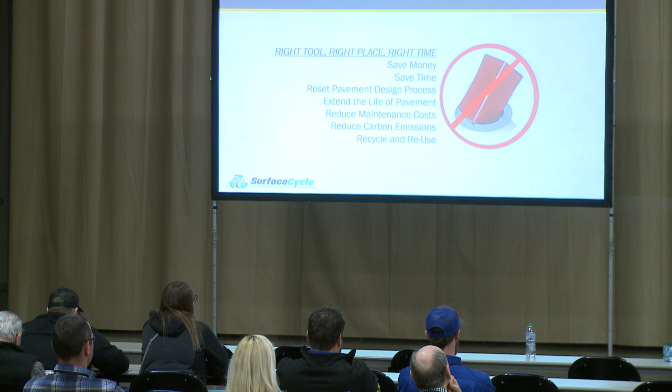That's really applicable when it comes to cold-in-place recycling. And so in order to ensure you're utilizing the right tool at the right time, the right place, you should be able to say yes or check off each one of these things you see up there on the screen. You should save money versus what your alternative might be. You should save time, accelerate your construction process. You should give yourself a chance to really change your design process and how you look at that whole entire pavement layer system when you're doing that. And through that, you should be able to extend the life of the pavement, make it last longer if you're utilizing the right thing.

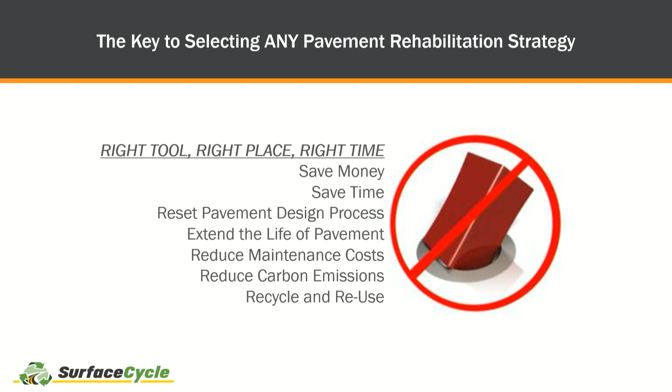This is when you compare it to the other options available to you. Ultimately, you want to reduce maintenance costs. Some folks care about this more than others, in different circles I run in, but reducing carbon emissions and recycling and reusing matters too. When I think of roads we've recycled in the past with cold-in-place recycling, when we see an old, tired, aged, oxidized asphalt pavement, I don't see that as a liability. If you're an owner, I would look at it as a resource that taxpayers have already paid for. The rock that's in that old asphalt is still there, still good. The asphalt that's there is still good. It just needs to be repurposed. So really, the last thing you should do is tear it out or take it apart. If you can repurpose it, it's a better investment, and you're utilizing the materials you already have there, ultimately leading to lower costs.

So what are the benefits of cold-in-place recycling when you utilize it on the right road, at the right time, in the right place? You should see a reduction in pricing of 35 to 50%. That's the type of benefit you should be looking for. If you're not saving that kind of money, there's probably a different technique that would be better for you. The great thing about cold-in-place recycling is you're creating cold mix, and cold mix is really good at reducing or even eliminating reflective cracking in your asphalt pavement. I'll talk about why it does that a little later, but whenever you can reduce reflective cracking, you're going to get a pavement that lasts longer.

So that's why you want to do CIR. With reduced cracking, your maintenance costs go down. You have less cracks to fill, less water infiltration into your subgrade and base down below through those cracks, making your pavement live a longer, better life. The CIR process on the right road, properly engineered, will last 25 years plus. We have some examples where it's lasted more than 40. It really just depends on the condition of the road when we first started.

And this is where you're applying it on the right road at the right time. We have done this on roads when it was the wrong project, wrong time, wrong pavement condition - they might last 8 years. So really, project selection is key to making cold-in-place recycling work for you.

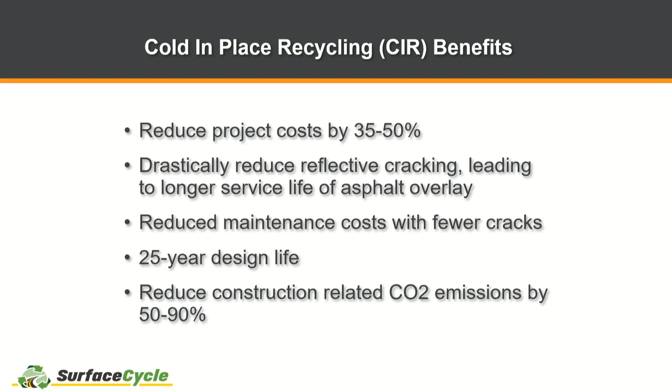And then you should reduce construction-related carbon emissions by 50 to 90%. I know in North Dakota this isn't a big deal, but in other states like Colorado, they're talking about carbon emissions all the time. The state of Minnesota, legislatively, has to start reporting CO2 emissions on their construction projects by 2028, and we're kind of scrambling.

I'm from Lakeville, Minnesota, by the way. And the DOT and the paving associations, everybody's kind of scrambling to figure out how we're going to do that. So I don't see that coming to North Dakota anytime soon, but folks around here are doing that.

So let's get down to the cold-in-place recycling process. This is a multi-unit train. The process itself is we want to go out on an old, tired, oxidized road of asphalt, and we want to basically repurpose that old asphalt. How are we going to do that?

Well, we're going to cut that road up. We're going to pick it up a full lane width at a time with that mill at a depth of 3 to 4 inches. We're then going to crush and size that recycled asphalt down to whatever specified size it needs to be. Most of the time it's 100% pass at 1.5 inches, sometimes 100% pass at 1 inch. We can change up our approach with the equipment we have to really meet any gradation specification that's out there.

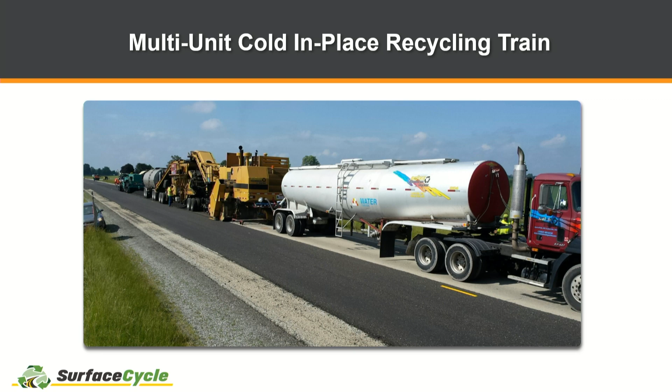After we've recycled that asphalt and sized it, we add some oil to it - might be an emulsion, might be foam. We make cold mix and put that cold mix in a windrow. Then we pick it up and pave it like you would a normal hot mix job, with a pickup machine, modern paver, and you roll it out.

So we generally get about 2 lane miles a day as our production goal when we're doing cold-in-place recycling, so we can move right on down the road. Now that can vary a bunch. What makes it vary the most is the hardness of the rock that's in the asphalt.

I'll give you 2 examples from Minnesota. If we're working in the southwest part of the state where they have quartzite in their asphalt, that stuff cuts hard - it is hard rock, really abrasive. We might only get 1.25 miles a day, sometimes just 1 mile if we're doing a 4-inch cut. We go to the eastern part of the state, though, along the Mississippi Valley, where there's a lot of limestone - it's really soft.

That stuff's easy to cut, it's not so hard - we might get 4 miles a day. I think our highest production day, we got 5.2 miles in 1 day with the process. It just depends on how hard it's going to cut.

And what are we producing? We're producing cold mix. A lot of folks, when you conceptualize cold-in-place recycling, you come out to a job and you're going to see something that looks a lot like hot mix, honestly. So it's going to be black, it's smooth, it's paved in a similar fashion.

But it's different. Picture on the left there, that is a cold-in-place recycling job, where that lane on the left is the lane to be recycled. The lane on the right has already been rolled out - it's completed, so it looks black and smooth, looks a lot like an HMA job. But the 2 materials are very different.

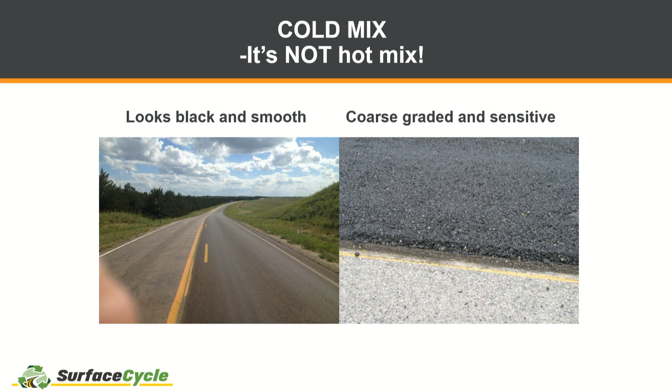So when we make cold mix, the percent voids in cold mix versus hot mix are about double. So we have a lot more free space and void space in it, which is great because that helps prevent reflective cracking. What it's not great for, especially here in the upper Midwest, is making it through a winter, okay.

If you had a cold mix mat that had been compacted and left out to the elements in the winter, not surfaced with anything, you're gonna get water infiltration. It's gonna freeze and pop out and make a mess. It can't live on its own, so it always has to be surfaced with something. That's why I say it's sensitive - it needs to be covered up, it needs a blanket over the top. There's lots of different ways you can cover it up, though. We'll talk about that in a bit.

It's gonna jump forward like 3 times now.

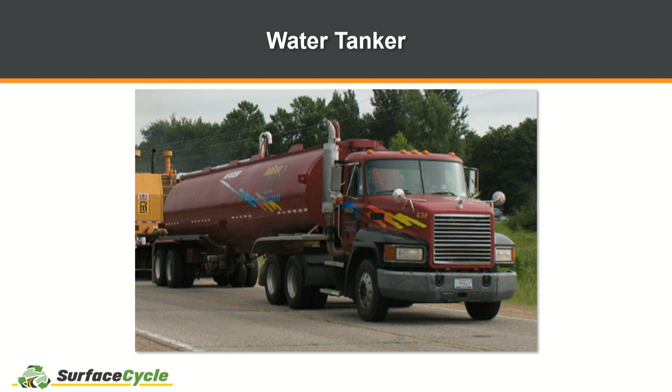So I just want to pull the parts of the train apart and tell you about what we're doing with each of them, with the construction process. So up front, you'll see a tanker. Most of the time it's a water tanker, sometimes it's an oil tanker. An oil tanker is basically feeding the surge bin at the back for making the cold mix. If it's water, we use water for several different things on the train.

One, we use it for cooling our wearing parts. We have these carbide bits we use for crushing this asphalt. With a little bit of water, they last a lot longer.

Two, we use it as a compaction aid when we're compacting our cold mix. We'll optimize the amount of water we should add in the mix design process, then we need to add a little bit of water.

And then three, another reason we use water is as a dust suppressant, to keep silica dust from exposing our employees to that type of issue, when we're crushing RAP or asphalt. We want to keep those small particles out of the air and keep our employees from breathing it in, or construction inspectors out in the grade or anybody else that might be driving by.

And so the reason we call this a train is because the first 4 pieces of equipment I'm going to talk about, they're all interconnected with pintle hitches. They're all connected together.

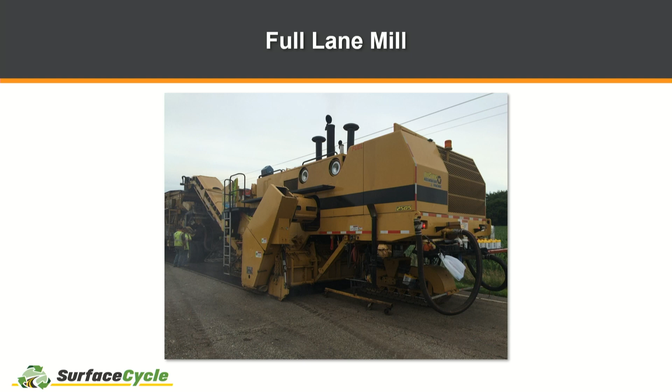And so the next piece of equipment, that's the locomotive on our train, is our mill. This is a big 12-foot wide mill. You can pick up the asphalt depth of 3 to 4 inches at a time. It just cuts 3 to 4 inches all day, every day.

That's the only job it has, is to pick up that asphalt and get it back to the crushing plant to make cold mix. Now what's unique about this mill is that it does have a down cutting drum. Most mills have an up cutting drum. An up cutting drum is really efficient at getting old asphalt up off the road and up into a truck. A down cutting mill head actually helps you with sizing, so we get additional crushing with a down cutting head. It helps us get better gradations.

We use this piece of equipment. Now I did talk about carbon reduction and carbon savings. This big mill is about 1,050 horsepower, and it's very thirsty. It drinks a lot of diesel, and it is not environmentally friendly, but it is the most efficient way that we have out in the roadway to get asphalt recycled today. So honestly, the biggest expense on our train with our equipment is that mill right there.

Pulled behind that, so this will be interlinked too with our pintle hitches, is our crusher pug mill platform. And so the RAP that comes up off that rear conveyor, we get dumped in the screen deck. We screen 100% of the RAP that goes into our cold mix, so we ensure we have 100% sizing on our material. And that oversized material actually moves away from the right side of the screen to the left and goes down into that crusher.

So we're able to have a secondary crush. We crush that RAP a second time - not mill heads the first time, second time's with our crusher. It goes through a closed loop conveyor system back up to the screen deck. If it's sized appropriately, down it goes up to the pug mill. If it's not, it goes through the system again until it's crushed down to size.

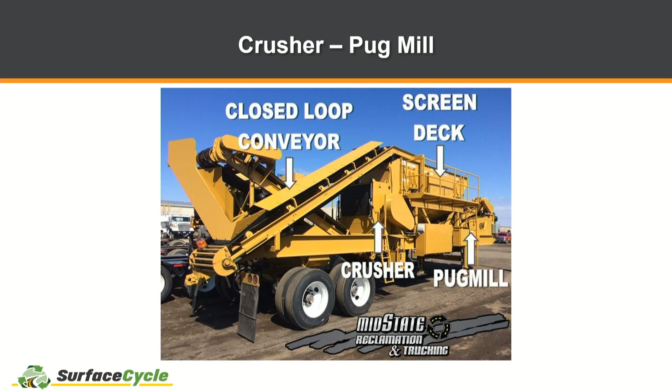That material then gets dropped down in a windrow that drops down in between those two tandems in the back, and off we go. The last piece of the train is our tanker, or our pup, or oil tanker.

We call it a pup. I've asked our office why we call it a pup. I don't know where that started. I'm not sure, no idea. But I guess that's what we call it.

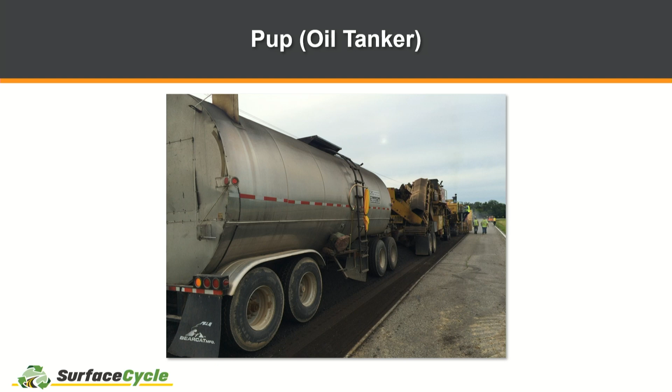So basically, that can carry about 6,000 gallons of oil in it, and we're using that through a piping system to get the oil back up to the pug mill to make the cold mix.

So if we're doing a foam job, that's just a PG graded binder that we have to heat up to 325 degrees. We do have independent heaters on that pup to heat the oil up to temperature as well on a roadway job. If we're doing emulsion, we don't have to heat anything at all. Everything runs at ambient temperature.

So that's a big windrow we have there. With the cold in-place recycling process, it starts looking then after that like an HMA job. So we're gonna pick that up with a pickup machine, and then we're gonna paver lay it with a modern paver. That paver's got all the bells and whistles with the ski, full electronics on it, and all the things you need with a screed to get the smoothest ride possible out of the process.

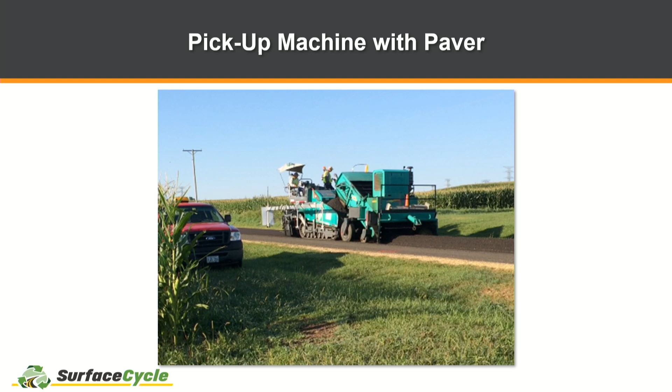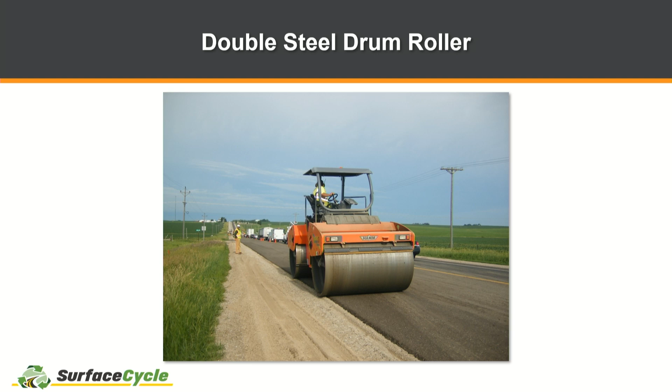After that, we need to roll it out. Generally, we start with a double steel drum roller on top of that mat. Remember, that thickness is about 3 to 4 inches. We'll oscillate or vibrate the first pass count back and forth to refusal. With that double steel drum, then we'll hit it with a rubber tire roller, kind of knead that surface back together. And lastly, that same double steel will double back and go over that surface, but not oscillating, just static, not vibrating. And we'll establish a rolling pattern with a construction technician that's out there with a nuke gauge to optimize that density.

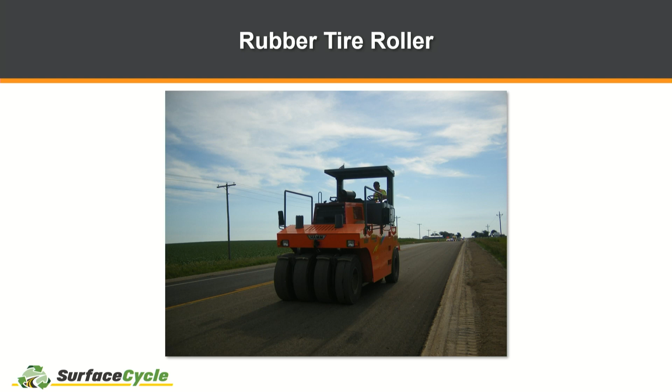Anytime through the course of the day, the one thing that's unique about CIR is the material that's in the road is what we have to recycle. So if we have a 10-mile long job and it was paved 5 years apart, halfway through the job there's a five-year difference in mix and materials. Once we go to that transition spot, we'll update our rolling pattern because we now have new materials that we're contending with. So if you have a road that has a bunch of different stuff on it, that construction technician is just going to be busy all day doing rolling patterns to ensure that we are getting the optimum amount of density on the job.

Here's the train kind of pulled back together. Again, like I mentioned, 2 lane miles a day is generally our goal. We do a full lane width at a time. Some folks wonder, well, how wide can you go? We've gone out as wide as 21 feet in one pass.

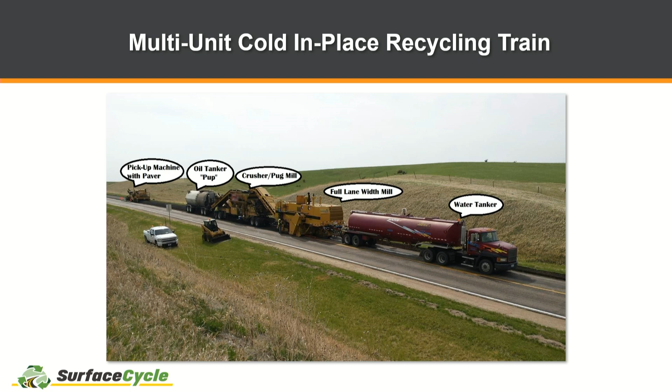So we do that. We put a secondary mill out in front of this setup here, set up kind of a windrow in front of the train, and it picks up all that material at once. I can tell you this, 21 feet's the max, we can't go any wider than that. Also, 21 feet at 3 inches is the max. If we go 4 inches, we wouldn't actually be able to push all that cold mix through the throat of the paver.

So there are limitations to the process. If you had a lane width that was wider than that, or a need wider than that, we would just make a second pass with the train. But we can accommodate wider lane widths fairly easily.

So what do we add to make the cold mix? If we're going to add an engineered emulsion, that's what the state of North Dakota's done mostly, we'll add about 3% by weight. Most folks using a standard emulsion are going away from that. Most are now using an engineered emulsion where they add a chemical package to a standard emulsion to get better density, better stability, it paves better, and it works out better for you. There's actually a really small investment to move up to an engineered approach, so that's something we'd prefer.

If we're doing foam, we do a lot of that in Iowa. Iowa does a lot of PG-graded binder foam. We'll use basically latitude to determine the binder grade we're using. Up here in the upper Midwest, we're using a -34 grade. As we work our way south, a -28. If we get down into Texas or New Mexico, we'll use a -22. So we match up that binder grade with cracking potential and make sure those work out well.

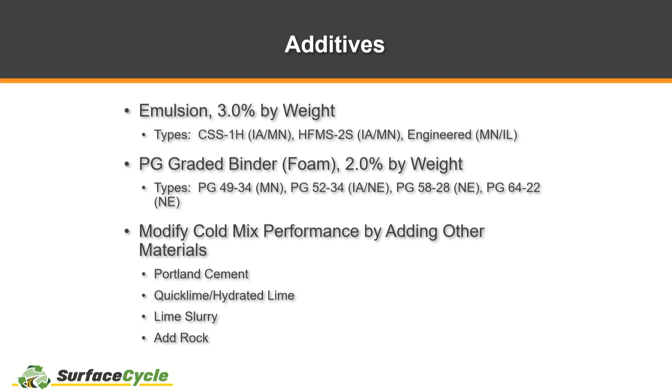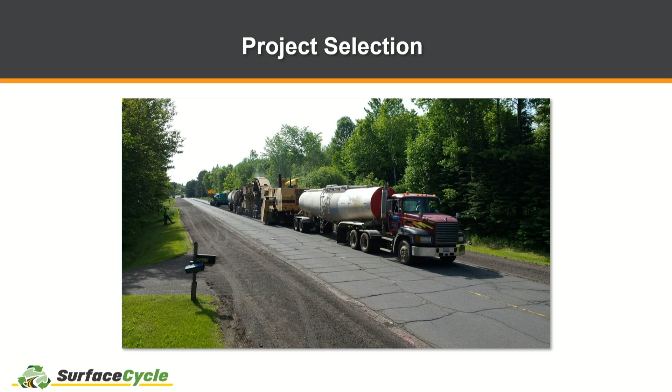Now let's get down to project selection. What types of jobs does CIR work well on? Jobs that have asphalt pavements that are old, tired, shot, oxidized, with some cracking in them are great CIR candidates. If you've got alligator cracking throughout the road, it's not going to work real well, but not much does work with alligator cracking. You kind of got to start over. Wrong tool, wrong time, wrong place.

But this is a job we did just outside of Milwaukee. Maybe you can see there's a ton of transverse cracks on this road. The CIR job we did was in 2014. I drove that last summer, and I think it had a crack in it every 190 feet. So it really reduced the reflected cracking in the road, even 10 years later.

But you can see the longitudinal crack that's in the road is in the middle of the lane. So what does that tell me, if I put my engineering hat on? The asphalt's just shot. If we would have seen two longitudinal cracks along the wheel path, with some rutting and some yielding, then I'd say whatever's below there is probably giving way too now, and in that case you don't want CIR there. We can't fix structural issues with CIR. We can fix asphalt that's old, tired, and aged out - that's where it works best.

And we do CIR on top of HMA that's over concrete too. We've done CIR on 12, 14-inch thick sections of HMA, and we've done it on 3-inch sections of HMA. We really make it work just about anywhere.

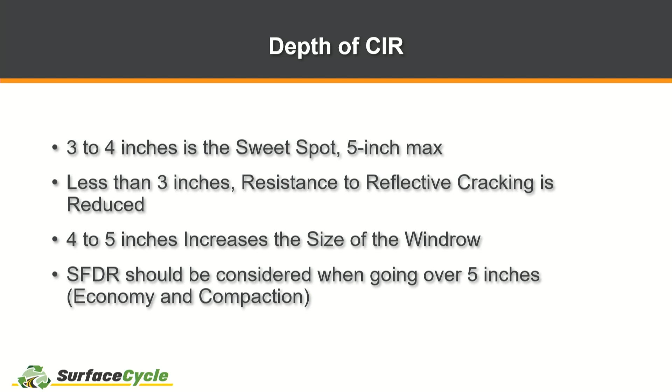But there is no set rule, like you have to grab half of the asphalt thickness, the HMA thickness, when doing the CIR process. That's not a rule. Some folks have said that in the past, but that's really not the case. We can make it work with any thickness of HMA you leave behind.

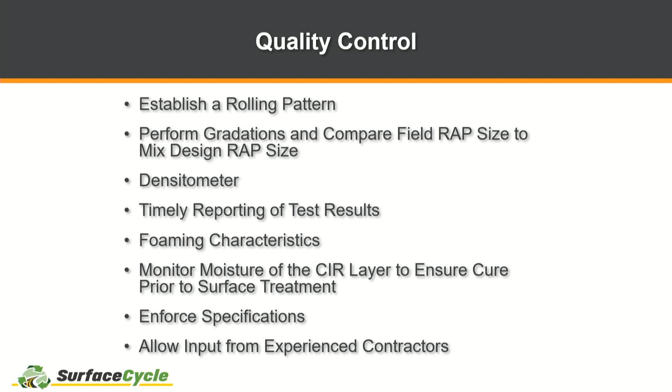Quality control - this is an engineered process. So we have a construction technician out there on the grade. They're going to help us check our gradations, monitor our yields, our incorporation rates of our materials. They're going to be doing density testing, basically making sure that what we're being paid to deliver, we are delivering. So if you're an owner, that's something you always want to make sure you have in your specification, as a robust QC testing parameter.

Surfacing a cold mix can really depend on the current traffic you have today and your anticipated traffic in the future. We've seen lots of different things go on top of cold-in-place recycling. We have seen double chip seals work really well on lower volume county routes, even some city routes - it's a really great option for you. As traffic volumes come up, microsurfacing can work well on top of CIR. Keep in mind, the only way you get a 25-year design life out of CIR with a double chip seal is if you maintain the chip seal.

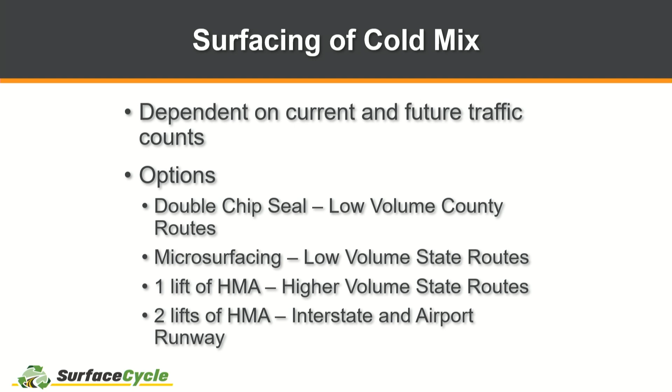So I don't know, year 8 to 10, you probably got to put another lift on. You keep an eye on that, and then maybe years 17 to 19, you got to do another one on top of that to get to your 25. But we've seen it get there in the past. As we work our way up the state routes, we've had a lot of success with one lift of HMA on state routes, and out on the interstate, we've done it with two lifts of HMA. We've even done some airports with it as well - a 4-inch CIR with 6 inches of HMA on airports here in the upper Midwest with some really great successes.

So just kind of a case study - this is a project we did with the North Dakota DOT back in 2021, just outside of Hettinger in the southwest part of the state. It's a great cold-in-place recycling candidate. I know there were some folks I've been talking to today that rode Highway 8 before we did the CIR - Northern Improvement did the HMA. It was one of those roads where if you had an open cup of coffee there, you'd end up with a burnt lap. It was really bad, the ride quality was very poor on 8 out there.

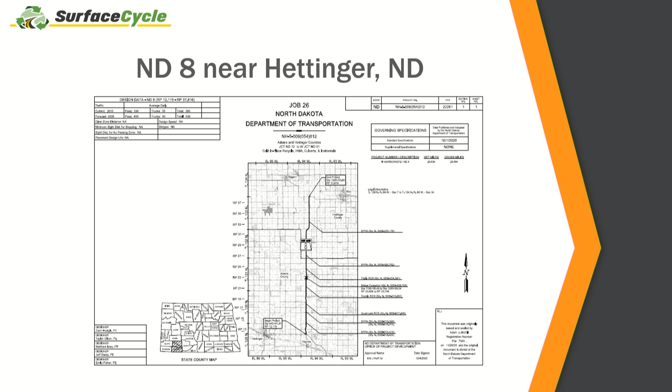And so here we are out there recycling, beautiful part of North Dakota. Out there we had the 4 pieces, interconnected with pintle hitches of our train. Out in the front there, we had a little mill because we were actually recycling a 14-foot lane width at a time. So we had a little windrow out in front. We also had a little bit of cement powder added to this job per the mix design.

So here's some project details. The job was about almost 25 miles long, mostly 3-inch CIR with some 4-inch CIR.

We ended up using an engineered emulsion, so that designation was a PGXX minus 28 when the DOT let it. That'd be what, as a contractor, we're looking for that oil type if you're looking for engineered emulsion here in North Dakota. We added 0.5% cement, and in total we recycled over 68,000 tons of that old HMA.

That the state owned, right? We repurposed that for the state. And it was overlaid with 3 inches of Superpave. I've been out on that road several times since, and it's still riding really well.

There's a TSD, a traffic speed deflectometer. I think they're going to test that this upcoming year. Basically it's a falling weight deflectometer that can drive at speed, like 50 miles an hour. They're going to run that down, hopefully, on this section of North Dakota 8 this year, and get some feedback on how that road's living its life, how strong it still is.

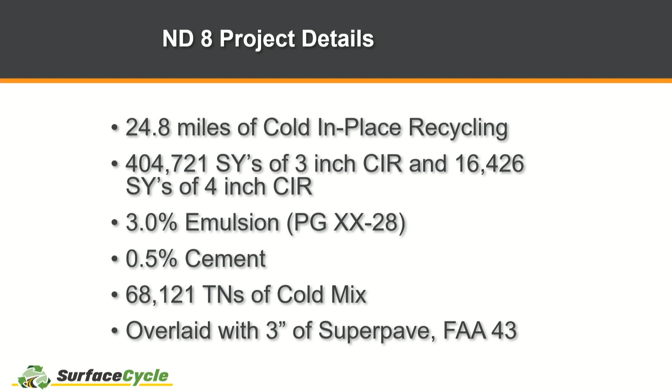So pricing for the process: folks interested in this, it was about a little under $80,000 per centerline mile, at a width of 28 feet. If we were recycling a 24-foot width, that'd be about $67,000 per mile.

So we talked about right tool, right time, right place. This might not be in your budget. If that's the case, this is not the solution for you - it's probably a little more long-term fix. Look at life cycle cost analysis.

But you break that down at a ton price of cold mix, it was just shy of $29 a ton. I'm not really sure what you guys are paying for hot mix by the ton here today, but in this type of application, keep in mind you have to surface it with something - this is not a finished product, so you have that surfacing cost to it. But if you're looking to budget, those numbers are good numbers to have.

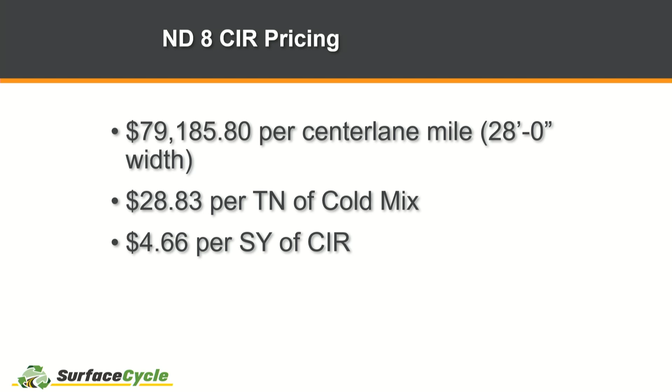And then as a contractor, we always really boil everything down into square yardage price. So that 466 means a lot more to me than it probably does anybody else here, but that's the number we always keep an eye on.

And then a unique thing we've been working on with CIR, because we are recycling asphalt, is that we're creating carbon credits with that selection to go from an HMA structural design to a CIR structural design. What we're able to do is, through a series of following an ISO standard, looking at our fuel consumption, and then working through Verra's marketplace, we've created carbon credits that we've now sold on the market.

So actually the credits that we produced off that ND8 job got sold to BMW last fall - they wanted to buy them. So if you are the state or the county and you want to make your own carbon credits and sell them, give me a call, I'll tell you how to do it. Pretty slick - all you need is some fuel consumption data, some production data, what type of equipment you got on the job, and you're ready to go.

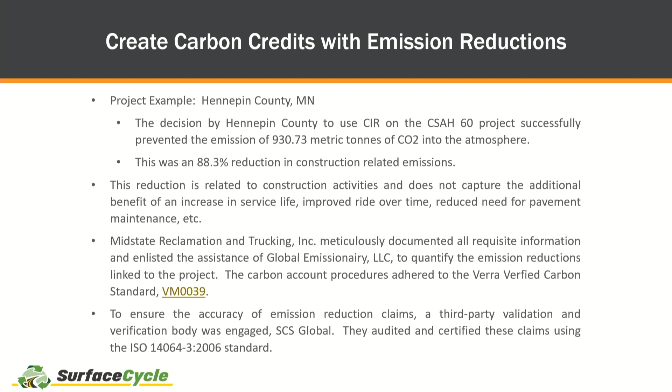So on North Dakota 8, if you look at our CO2 savings, baseline design, if it had been similar structurally, HMA to CIR, would have produced about 4,300 tons of CO2. Through the CIR process, though, we only produced about 1,400 tons. So a significant reduction - on that job, we reduced emissions by over 2/3. Barely over 2/3, but over 2/3.

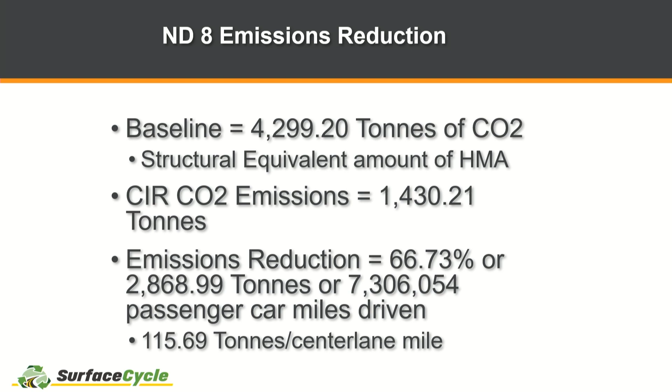And what does that equate to, that 2,800 tons? It's 7,306,054 miles driven by a passenger car. The EPA actually has a website where you can put in the tons and convert it to other things so the numbers make sense to you. I definitely encourage you to do that. These are metric tons, by the way.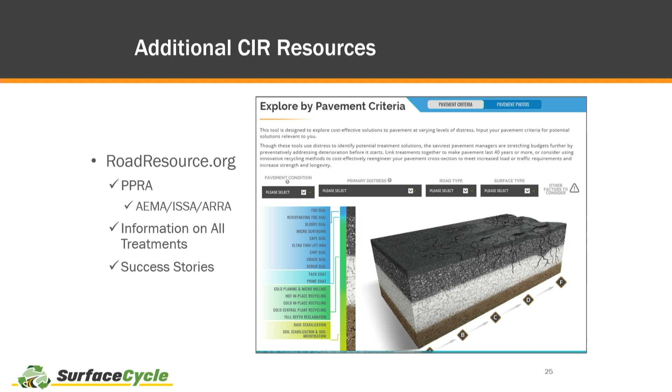Just kind of wrapping up here, if you guys are looking for additional information on cold-in-place recycling, one of the best resources is to go to roadresource.org. This is put out by the Asphalt Recycling and Reclaiming Association. It's free to use. There are over 500 individual pages within that website on how to recycle asphalt and also how to do pavement preservation. It's a really great tool, and it's free. It is awesome. A lot of time went into it by the industry to put it together. So I definitely encourage you to go there.

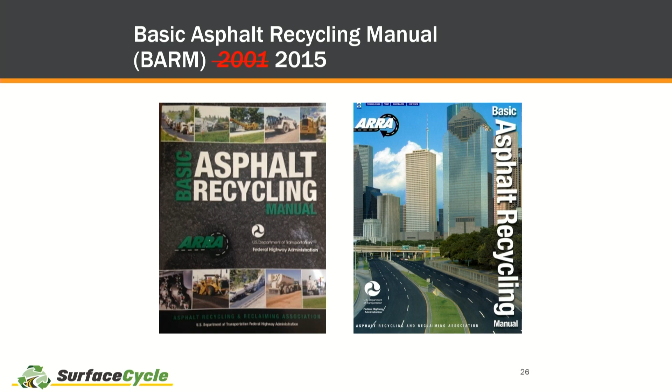If you want a book to put on your desk at the office, the Basic Asphalt Recycling Manual, we still have some of those at our office. Get a hold of me, I can put it in the mail to you. That'll talk about all the things I talked about today. It also covers hot in place recycling, soil stabilization, reclamation, milling. Basically, any way you can recycle asphalt is covered in that BARM.

North Dakota for the DOT. And I have a question regarding, I've got a roundabout in the city. I want to know how far ahead should I start the cold in place, like from an intersection?

So the first question here was about a roundabout and how far away from it you should stay with the cold in place recycling. Here's what happens with that cold mix: after it's been surfaced with something and it's cured out, you got no issues, but there's this time when it's tender. So if that roundabout is going to remain an active intersection, you do not want to have traffic stopped on that cold mix mat. Just like hot mix, when it's cooling down, if you got a truck sit on a mat that's not cooled, it'll dimple if it sits there. Same thing happens with cold mix if you don't have that material out of there. So honestly, what I would say is you probably want to hold that back, whatever the potential backup queue is at that roundabout, which could vary a bunch. But I would say a minimum 300 feet. And if there's a chance for that queue to be really long, like during harvest time when there's a bunch of people trying to get through an intersection and it backs up, you either want to contractually not do the work at that time, work around that, or do something else - but match whatever that queue length is.